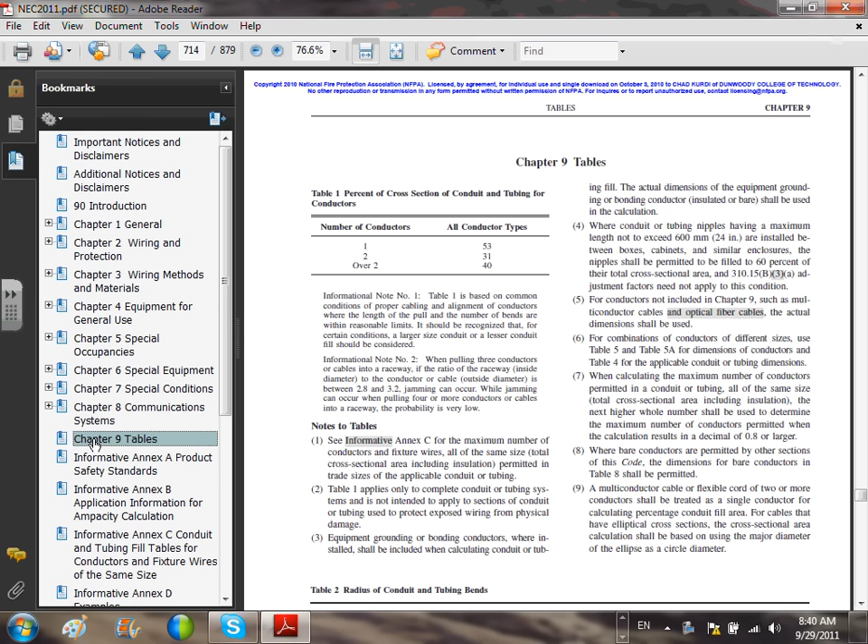Okay, so let's go directly into Chapter 9. Please go with your friend Chad to Chapter 9. When you have a conduit like this, when you fill the conduit, guys, there's a few things that you have to keep in mind. If you have not highlighted this table, Chapter 9, Table 1, please do so. We have a conduit. Either you have one conductor in the conduit, two conductors, or more than two. You can look at the one that I'm holding right here in my hand, it has tons of them. So that's a very important table.

So what you're going to do with your friend Chad, you're going to go here. Okay, where am I here? Mark. Highlight text. Okay, so the first thing I would like you guys to do is to highlight this table if you have not done that. This is a very, very important table to highlight.

So if you have one cable or one conductor, I'm sure some of you are looking at PVC. How would you have one conductor cable? Imagine a 2000 kcmil. Can you put five 2000 kcmil in one conduit? Can you? You can find a conduit that fits this. So if your conductors are huge, you can put them in PVC one conductor at a time. Remember that heat, induction heat, you're going to be very careful when you do that. So bigger conductors in PVC, nonmetallic, no problem. You can put them one conductor at a time.

That's one option. Second, remember if you have a multi-conductor cable. Can we have a multi-conductor cable? Four conductors, one assembled cable. Can I do that? How would you treat a multi-conductor cable? You treat it as one conductor and you fill 53%. 99% of the time, Chris, you will be filling at 40%. Everybody okay with that? If you have not highlighted this, please do so. This is one of the most important things that we have to highlight, and moving forward I want you guys to highlight it.

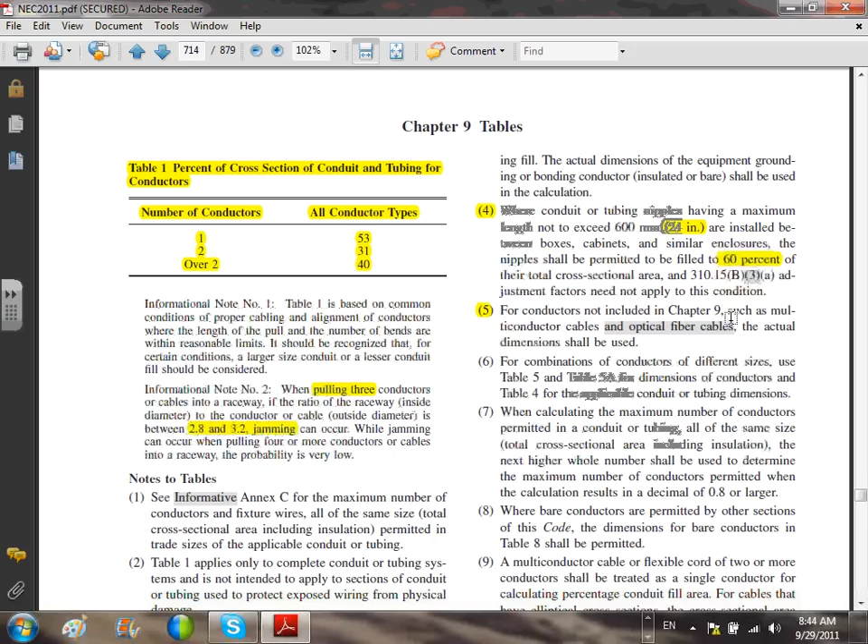Okay, another one, conductors not included, such as multi-conductor. This one is a very interesting note. This will tell you if you're using a multi-conductor cable, or fiber optics, how would you use fiber optics in a PVC configuration? We have it on the journeyman and master exam all the time, guys. If you're sitting for a journeyman exam, here's how they test you.

They'll ask you how many fiber optic cables you can fit in a 2-inch or a 4-inch PVC Schedule 40 if the diameter is 1/4 inch. Then you have to do your calculation from the diameter. What do you do from the diameter? You find the cross-sectional area, right?

Pi r squared, that's the cross-sectional area of a circle, and you continue doing the same calculation. So the only difference between a cable and a conductor is you take the cross-sectional area, pi times the radius squared. And when you get the area, you continue with the same calculation. So this is what it goes to.

If you have a multi-conductor cable, which you will be using, guys, what you're looking at right here is a very clear difference between a multi-conductor cable and a single conductor cable. What you're looking at here is 4 single conductor cables. If I put these 4 in one jacketed assembly and I pull them in a conduit, this becomes one multi-conductor cable. Does that make sense?

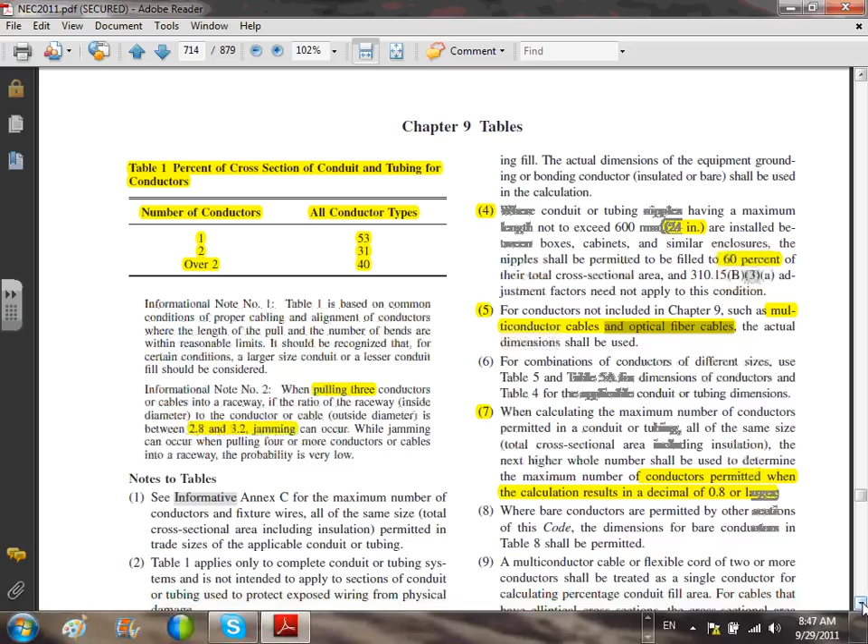And the last one, guys, look at this. If you read this, it will tell you a multi-conductor cable or flexible cord of 2 or more conductors shall be treated as a single conductor for calculating percentage conduit fill area. Once assembled in one cable, you treat them as one single cable when you pull them through, so you can fill it.

If I put one cable, 4 conductors in one cable, my fill will be 53%, right? Because it's one conductor or one cable. Remember that right here? One conductor or one cable. My fill will be 53% if these were assembled in a cable, which they are not. Cool? Very important concept. You can't move forward without knowing these notes. Any question?

Okay. So this is the idea why they drop it so much. Over 2 is 40%, 2 is 31%. What's the rationale? 3 is 40. Why is more than 2 better than 2? When would you use a 2-conductor cable? When would you use 2 conductors only? I guess you can use it for single phase.

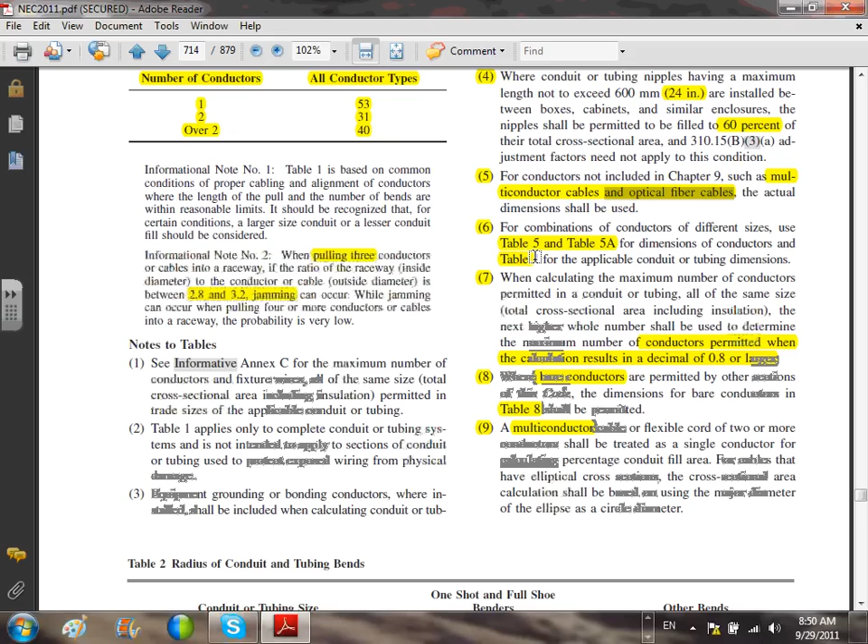And dimensions of conductors is going to be Table number 5. Okay, so we're going to be using these in a second. Really, the most important thing is the stuff that I did a minute ago.

Okay, moving forward. For your conduits, you use Table number 4, guys, to find the fill, the percentage of the cross-section area that you can fill, in all the approved conduits in the US that we use in the code. If the conduit is not here, you have to do a different engineering calculation. All the conduits that we use, guys, are here.

All the conduits are basically here. So let's use EMT. Can you guys see it? So Table number 4 gives you the fill for all the conductors. With an EMT, this is probably where you spend most of your time on this table. Most of your time. Cool? So how does this table work?

Let's go to the largest conduit I can buy as an EMT, which is 4. If I am pulling, which 99% of the time I'm going to be right in here, 40%, then I can fill up to 5.901 square inches of the cross-sectional area of that conduit. Everybody knows how to use that? So I would say 90% of your time you're going to be right in here.

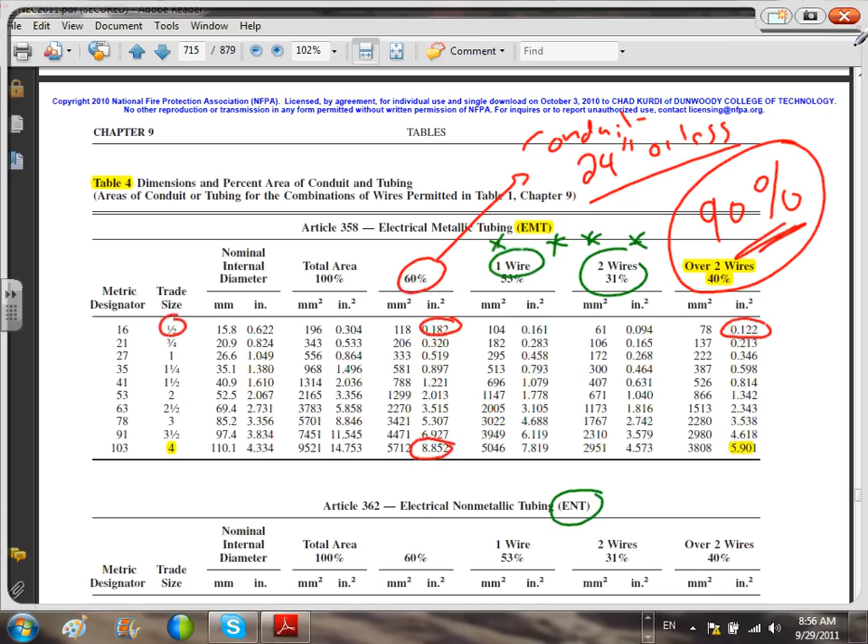Now, Ashley, my friend, if you go down, you will find all the approved conduits and their fill. So your ear, nose, and throat doctor is here, ENT, right? That's like your ENT doctor is here, the conduit, and all the other conduits are directly in that table. I highlighted only number 4 for EMT because it's the most common.

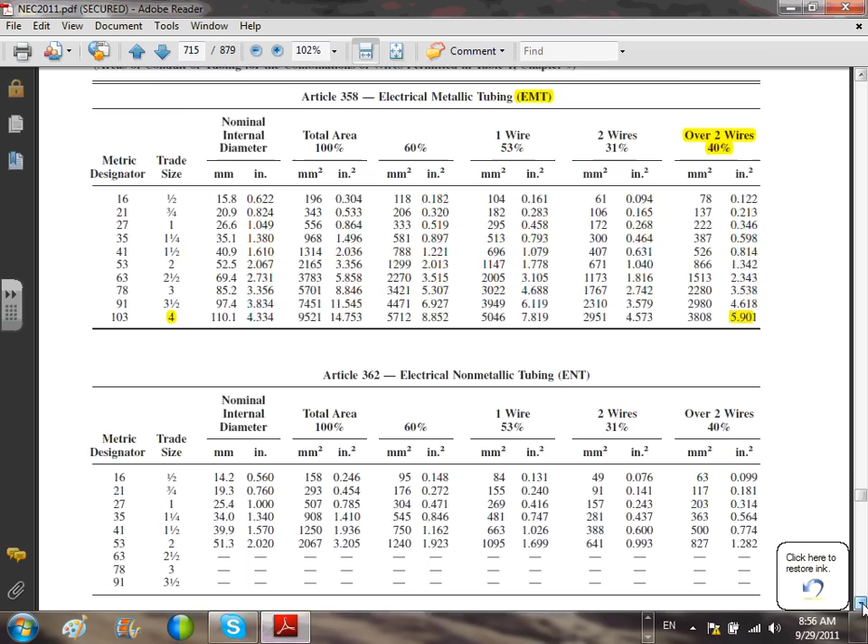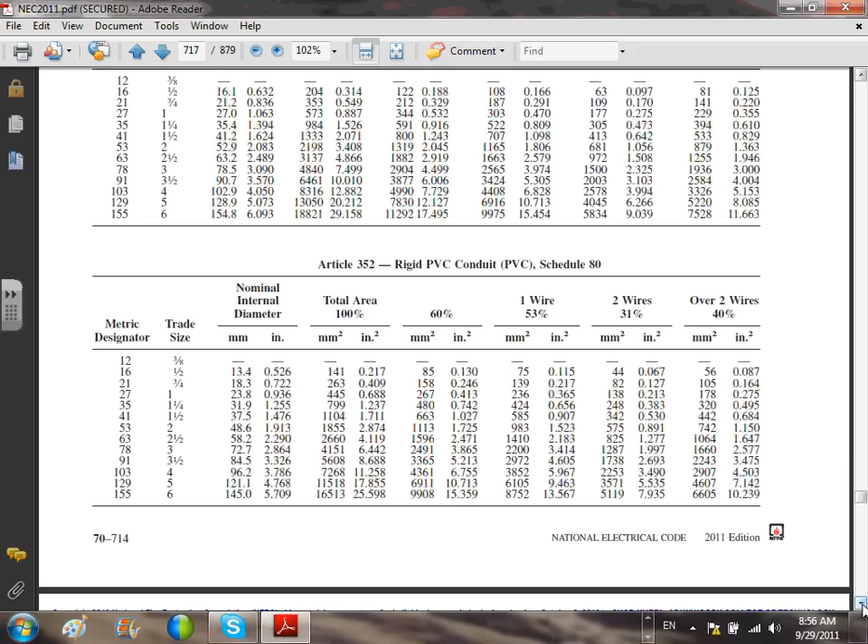Okay, moving on. You guys see the flex? All the way, keep moving. IMC. All the conduits approved are right in here. Now, Chris, all the conduits that you're looking at in these tables are where? In this calculator. All the conduits that you're going to use right here in this table are where? In this electrical calculator. So that's really cool.

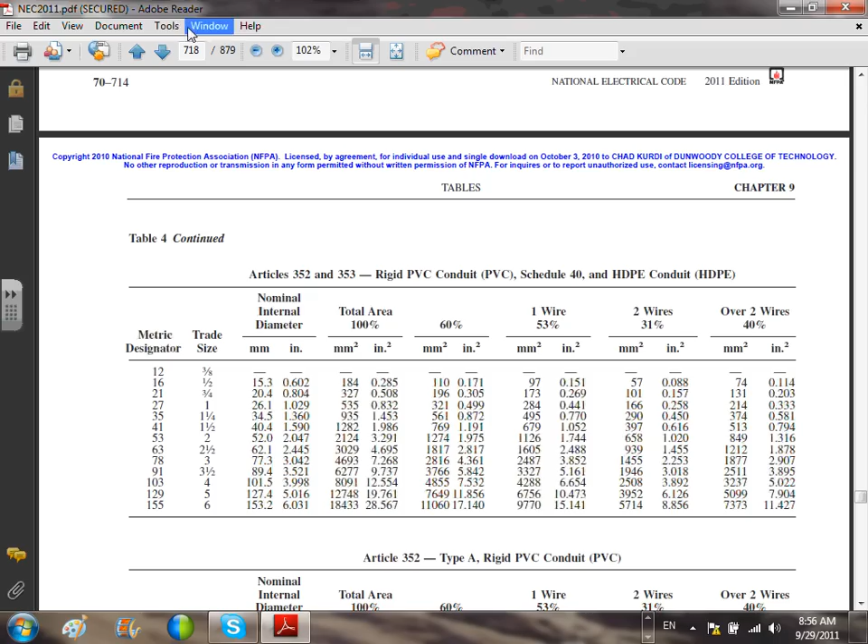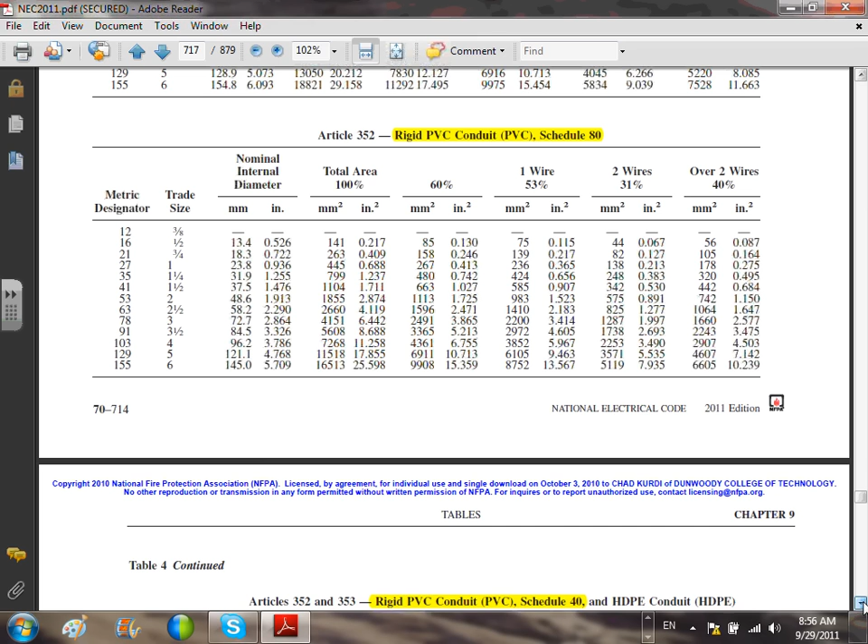Okay, moving on. PVC. As we move through, I want to highlight the most important ones, guys. So PVC, you must know PVC. I mean, this is must know. This is another well-respected conduit. PVC Schedule 40. If you haven't highlighted that one, please do so. You're going to use it. Did we pass rigid? Yeah, rigid. For hazardous locations, please highlight rigid too, because you're going to be using rigid.

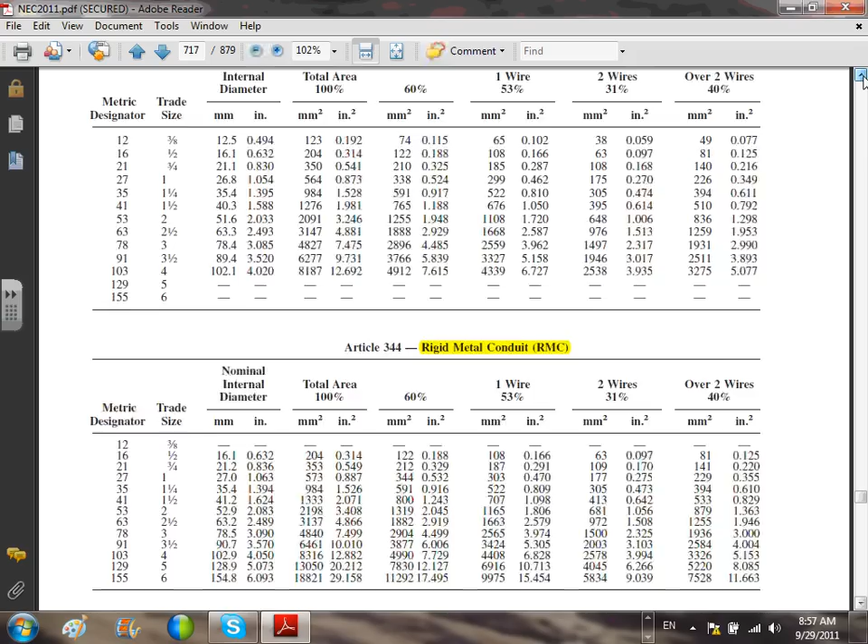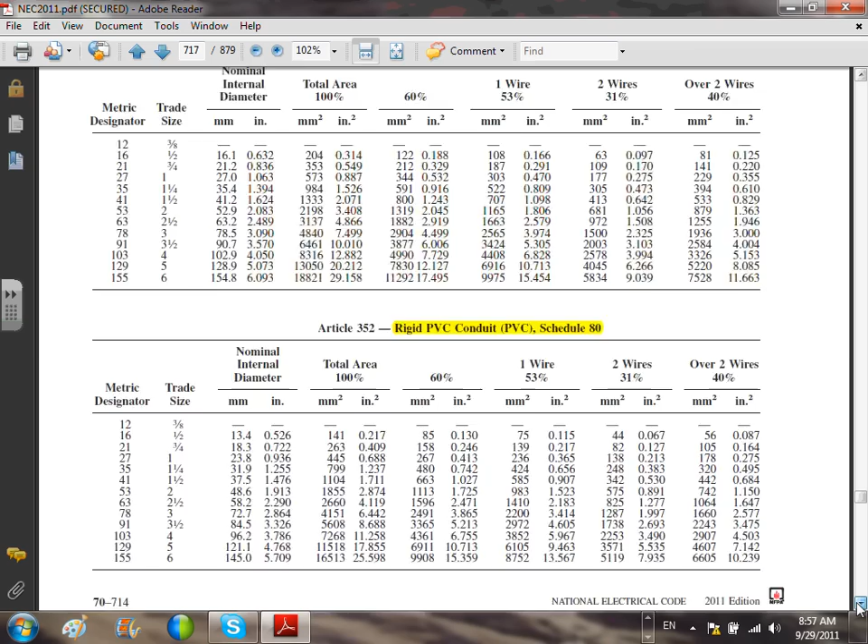Liquid-tight flexible metallic conduit, we only use it to tie to equipment. Okay, moving on, all the way we highlighted rigid type A PVC. I'm just highlighting the most important ones. Okay, that's it. These are the most important. The second table that you need to know and highlight, if you have not done that, is table number 5.

Any question guys about the conduit fill? When we do the conduit fill, define the cross-section area under the right type. Am I going too fast on that one? Okay, so highlight them, make sure you know them. You're not going to hear me saying too much about them in detail over the whole year. Later on, we start saying, I have a feeder, I want you to go size the conduit for me. Second nature to you. You're going to go, which conduit, Chad?

Well, you're the designer. 99% of the time, you're going to be EMT. If you're underground, you're PVC. If you're in a hazardous location, you're going to use rigid. Or for physical protection, you need rigid. That's it, done. If you're tying to equipment that vibrates, or a light, what do you need? Flex. What type of flex, Chad? Flexible metallic conduit, indoor; outdoor, liquid-tight. Done. That's all the conduit that you need. There are a lot of other conduits that have their own deal, but these are the most important ones. Okay, moving on.

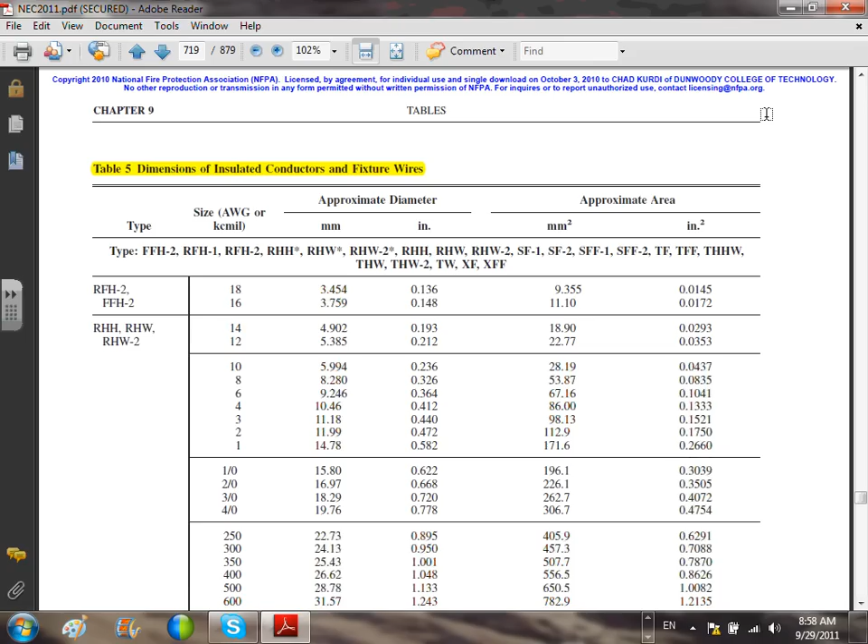To use this table, guys, it's interesting. Let me just tell you what's interesting about this table. There are a few things. Number one, the type. You need to understand the type of the insulation here. You need to understand the size. You also need the square inches, unless you're working in Europe and you use square millimeters. The diameter is not a big deal, but these are the three most important things in this table.

Okay, let's take this. Suppose I have an RHW insulation, and suppose my conductor was 600. Are you guys okay with that? 600. What's the cross-sectional area of this conductor that I can use for conduit fill? Right here. If you don't know this table, please get used to it. Another example. Suppose my conductor is RHW-2 insulation, and the size that I'm using is 4/0. So the cross-sectional area for my calculation is 0.4754. Everybody knows how to use this table? We're cool? It's as easy as that.

Now it gets easier, Phil. You don't even have to worry about that. Look at your friend, the calculator. All this information has been input in the calculator, and you can pull it directly for every size. Isn't that cool or what? So it takes the time out of going to the tables.

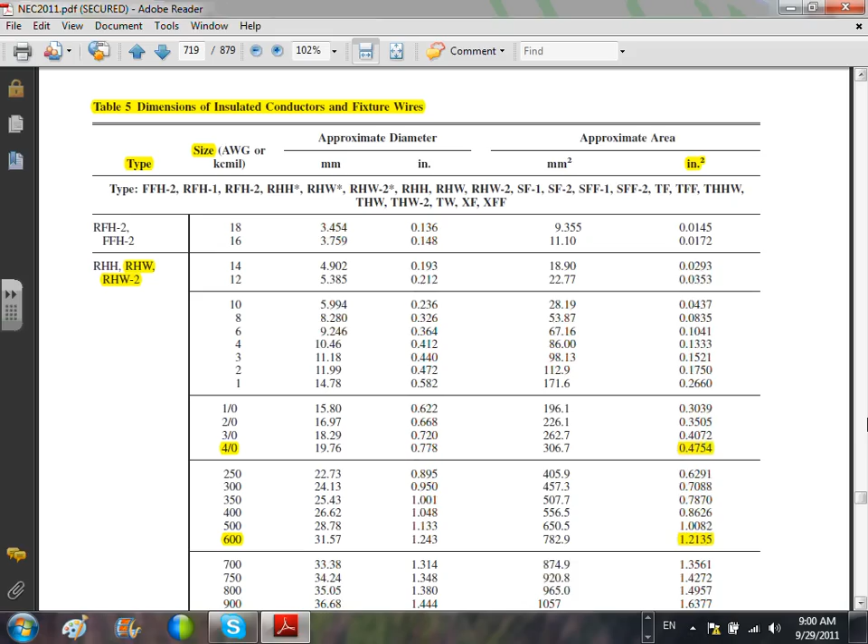The rest of the time you go golf or you go deer hunting or bear hunting, like Ashley would do other things.

Okay, let's keep going with table number 5. I'm going to highlight this calculator, guys. Very important when we use it: it doesn't take all the insulation. It only takes the most common insulations: THHN, THW, XHHW and XHH. These are the most common insulation.

Between these insulations, THHN, XHH, XHHW, THW and THHW, guys, you probably covered 90% of what you need in a building. Only 90%. The other 10%, you have to refer to the table. For example, if you're looking at RHH here, please don't look at it. It's not there. Special type of insulation. 99% of the time, guys, you're going to be using THHN, THHW, XHHW or XHH. So these are the most common insulation. Okay?

I think that when they put the X, they're all rated for 90 degrees from a derating purpose. To find the definition of all these, remember table 310.104. I don't know where I am on my computer now. Okay. They're all the same, but it's rated for 90 degrees. That's the difference, for example, with THHW. So X, where's the X? You got THHW, where's my X here? On page 119. Yours is going to be slightly different than mine.

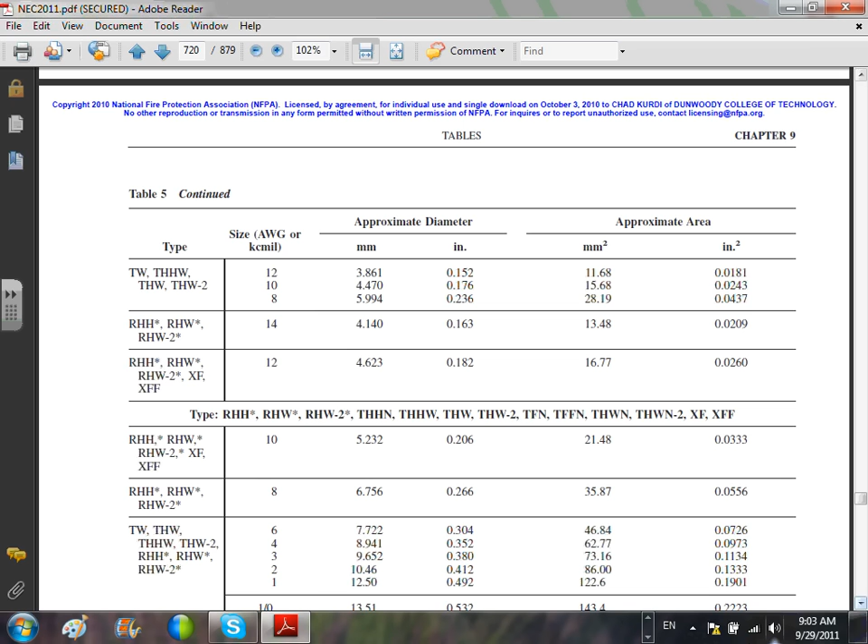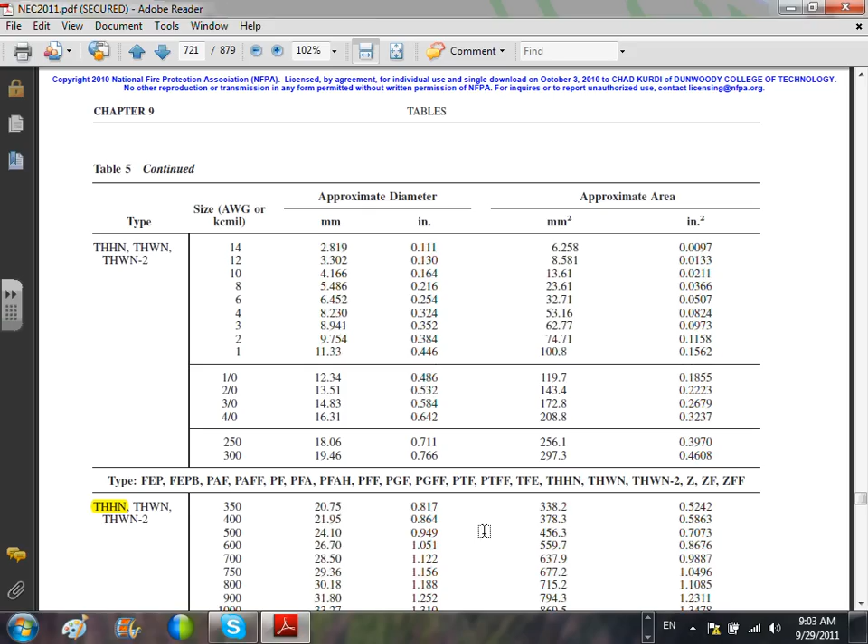So let's go highlight a few things here, the most common ones. Here you go, THHN. Let's go bigger. Here's my THHN, guys. I have a 400 amp panel, and I'm going to feed it from a THHN conductor to a location. I'm going to use a 500 kcmil. 500 kcmil gives me 380. 380, you can tie it easily on a 400 amp.

So the 400 amp panel is fed from 4 conductors, 500 kcmil each, and I'm going to size the conduit for it. So here's my 500 kcmil. Here's my THHN. Can you guys see it? There you go. So I have 0.7073. So what do you do? You multiply by 4 and go find yourself what type of conduit you have. EMT, and under which column? 40% column, and find yourself a conduit.

Okay, let's do that example quick here, guys. Here's my 400 amp panel. The feeder that feeds my 400 amp panel is THHN. I have 4 conductors, I'm not derating, 500 kcmil, and I need to size the conduit. EMT. You guys have any issue with that? 4 conductors. Let's do it. Here's the number that you need. I need somebody with a calculator, please.

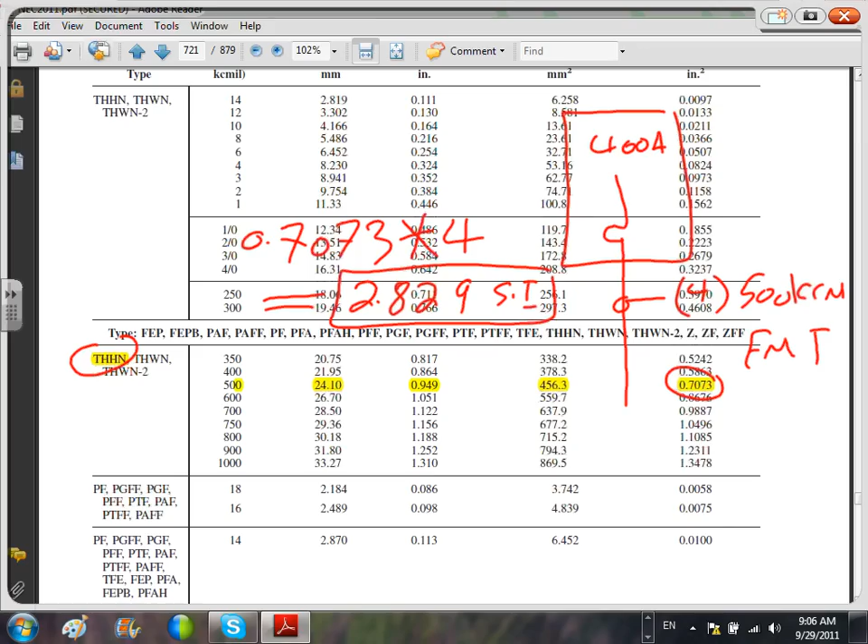We got square inches. Then what do you do next? I want you guys to remember the number. Everybody knows how to take this number and multiply it by 4. Later on, we'll be doing it through a calculator right on the spot, and I will do it in a second here. Let me take a snapshot of it. So let's go find a conduit right on the spot.

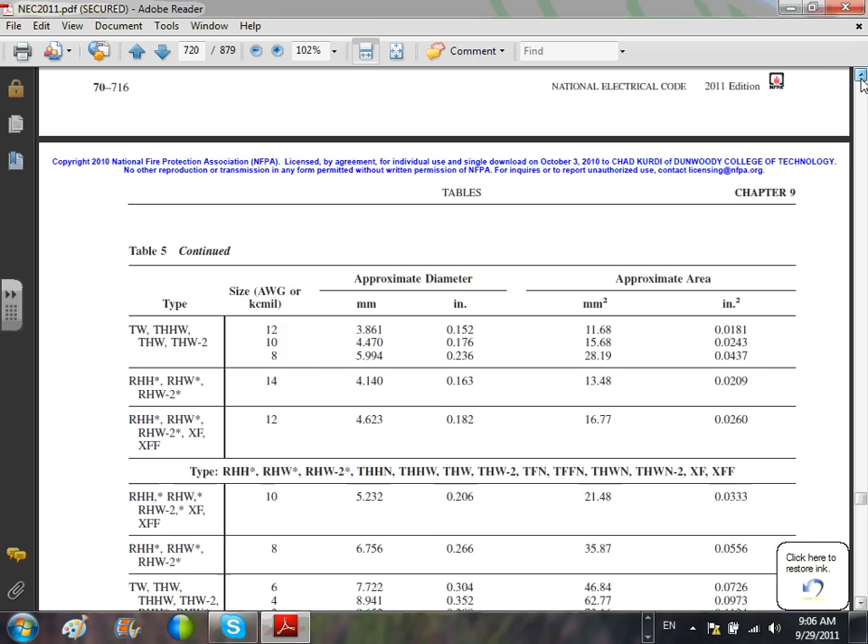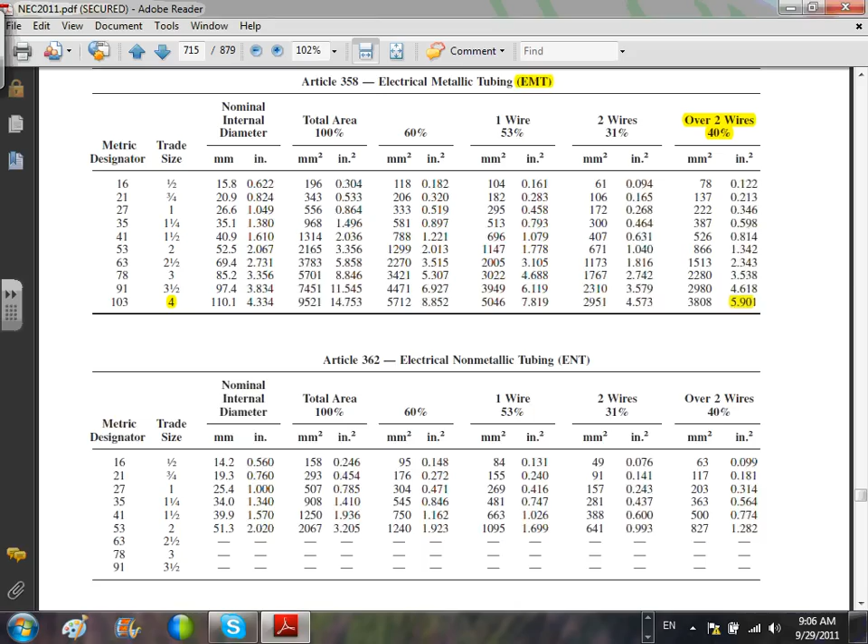We're going to go back to EMT conduit. You guys remember my beautiful EMT conduit? Back to EMT conduit. There you go. Went too far. Back to EMT conduit. Okay, so remember what was the number that we're looking for? Here's my EMT conduit. 2.829. My EMT conduit is here. It's all the conductors.

2.829. So how many of them are there? I have 4, so I have to go right here under the cross-section area, and I need to find a number that's equal or higher than that one. So I have 2.8, 3.5, 2.3. I need this number, right? I can't use 2.3 because it's low. If you cross-reference this number, that will get you to conduit number 3.

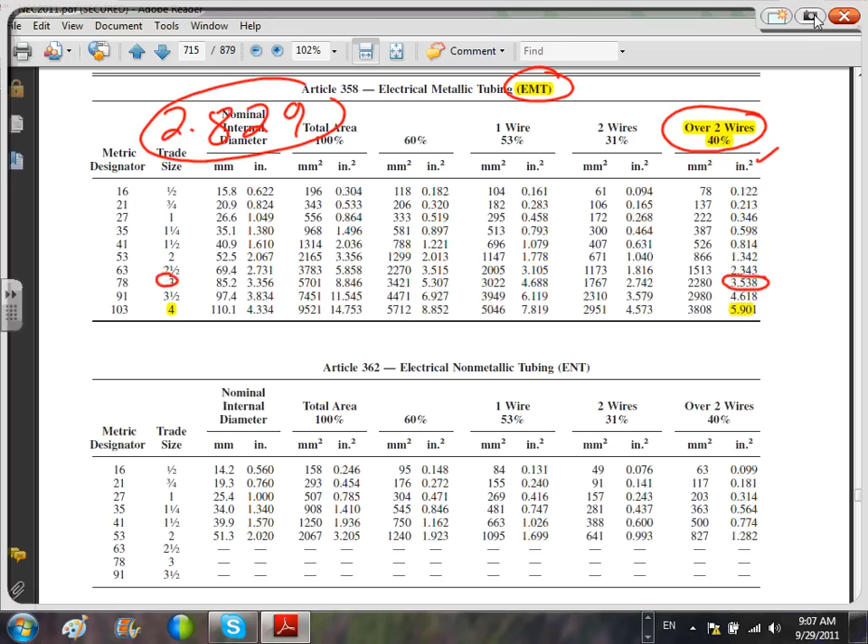Let's use the calculator. How about that? Let's use the calculator for that one. So number 3. Okay, get your calculator handy. So we did that one. Get your calculator handy, and let's go do it with our calculator. And hold your horses for a second with your friend Chad. Remember what we said?

Okay. The first thing I will do: since it's 3-phase, I always like to default to 75. So make sure calculator 2011, 3-phase, 75 copper. Everybody set at that by doing set 7 and set your calculator. How many conductors? Just a quick reminder, guys, we were 4 conductors and 500 kcmil, and the conduit is EMT, and we came up with 3 inch. Let's see if we come up with the same 3 inch here. Let's start here.

First, the conductor size. You're going to go 500, right? For the kilo, hit the word kilo. So I have 500 kilo. Kilo what? Kilo Chad or kilo dollar? Up to this point, it doesn't really know kilo what. So we're going to go from the kilo to wire size. See where it says wire size? Now I have just assigned a 500 kcmil copper to the calculator. 500 K wire size. Wire size right here. Everybody got that one?

Now, how many of them, Phil, do I have? 4. What insulation? THHN. Do you guys see the insulation at the top here? So I have assigned 4 conductors THHN, 500 kcmil each. That's what I told the calculator. Now what do I need next? Conduit. Everybody knows how to assign the number of the conductors: you type the number and then the type of the insulation.

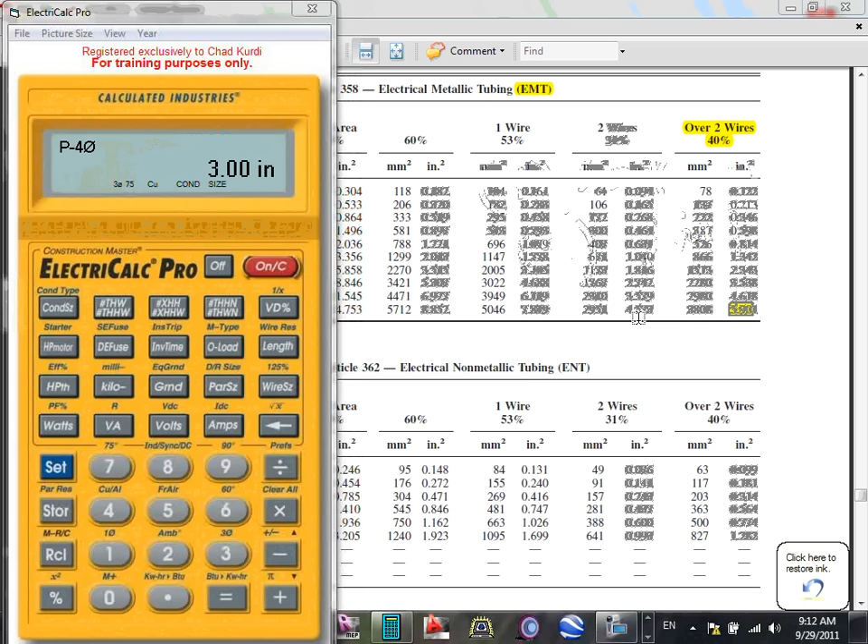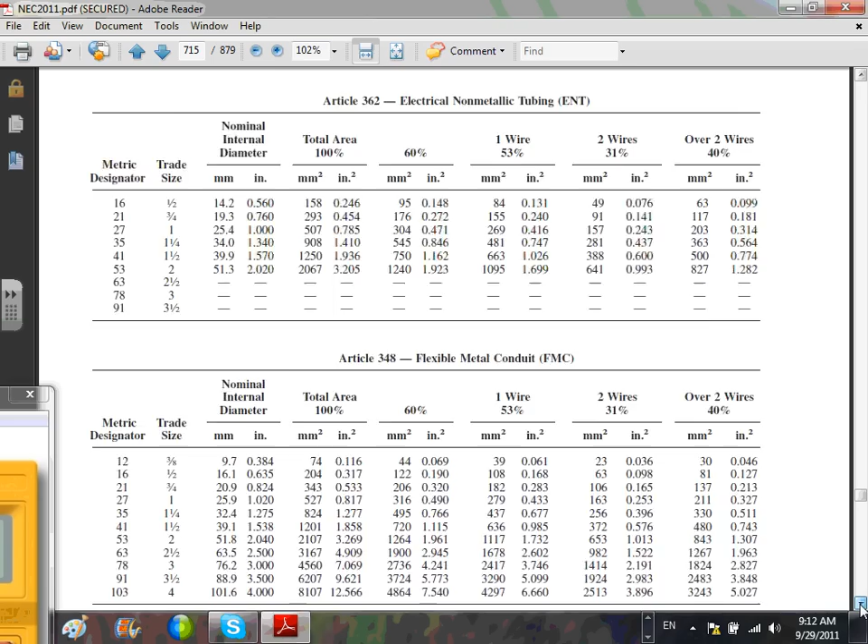Okay. Let's take a snapshot here and exit this so I can keep moving. I'm going to move my calculator to the side so it doesn't interfere with my business. Okay, so any question, guys? Here's my EMT all the way. So let's do another example. And Chris, I need your help with this example. Let's go back to, there you go, back to a real installation.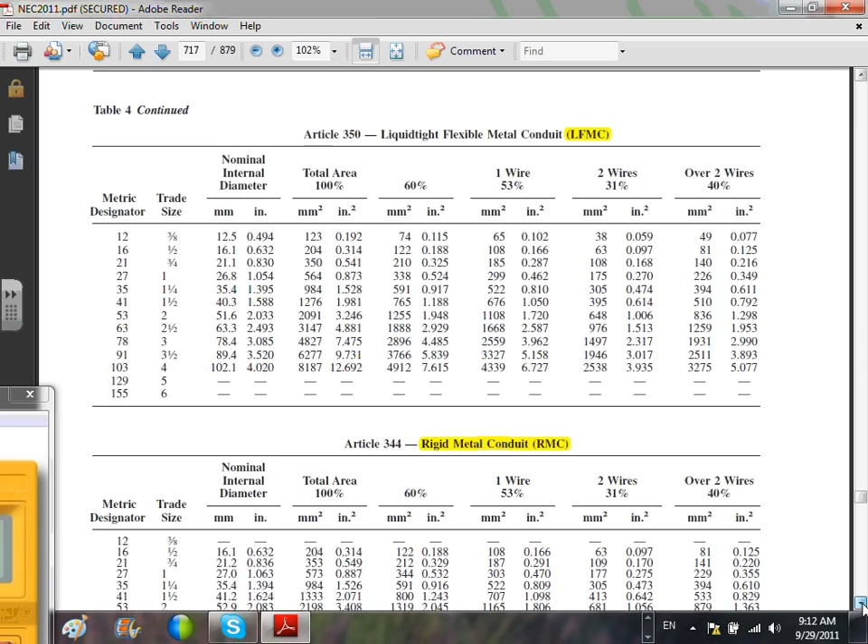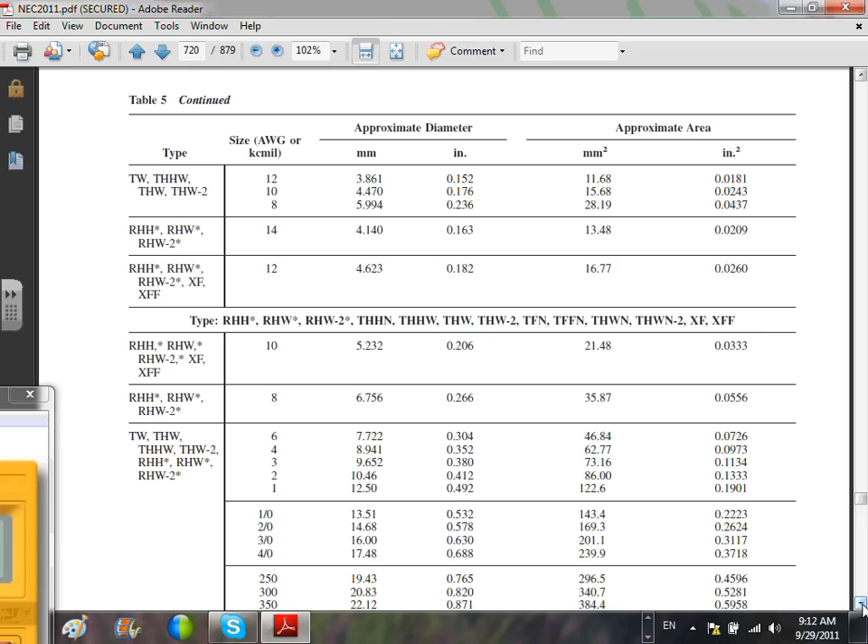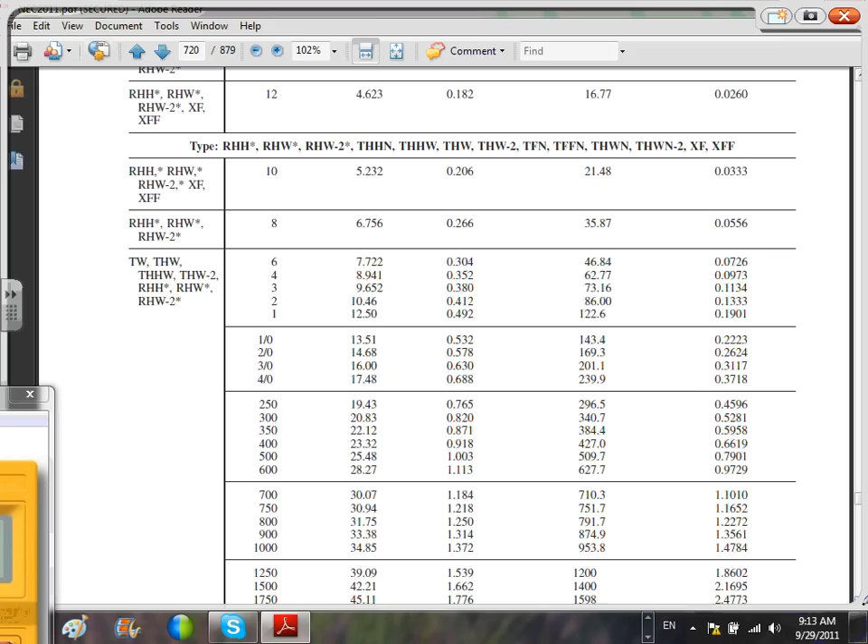PVC Schedule 80. We'll take a real example, guys, with THHW. Okay, do I have THHW? Yup, we have THHW. All right, here we go. This is a real example. We're going to encounter it all the time. I have a panel. My panel is, let's say, 400 amp, and you are sizing the conductor for this 400 amp panel. I derated the neutral this time. So here's what I got.

I got my 500 kcmil, 3 conductors, 500 kcmil, THHW, because we're going underground. Typical. You're going underground in W, right? We have 1 neutral, derated neutral. You can derate your neutral, no problem. Usually, when we do the calculation, we end up with 1 or 2 steps below the phase. So I have 500. I can probably go all the way to 400 with my calculation. I have a 400 kcmil neutral, the same thing, THHW.

The conduit that I want, Ashley, my friend, is a PVC conduit, because I'm coming underground. Conduit of choice is PVC Schedule 40. Can I use EMT underground? Yeah, but you will not be smart. You can, but it's not a good idea. It's going to rust. Can I use rigid? Yes, you can, but it will rust over time. The best conduit for the application underground is PVC. If it's buried, what's the likelihood that Chad is going to hit that conduit with his hammer? No. Okay, and I need one conductor, ground.

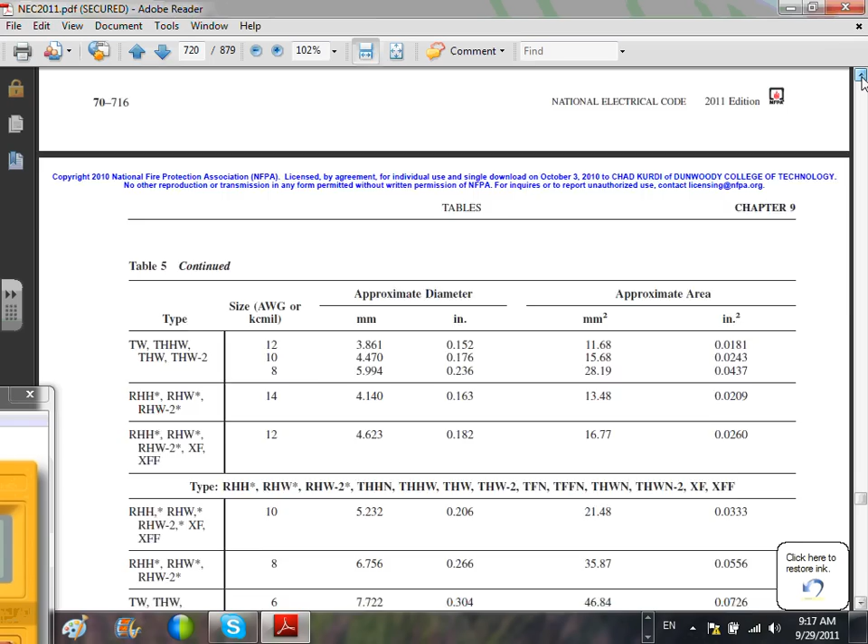So Chris reminded me of 3.146, and we're looking at what type of conduit. We're looking at a conduit PVC Schedule 40. And the question is, what size do I need in PVC Schedule 40? Everybody got that one? Straightforward. Do your math. So let's go X here, so I can go all the way up. You guys are going with me, right? What did they say? PVC Schedule 40. Chris, remind me again. What was that?

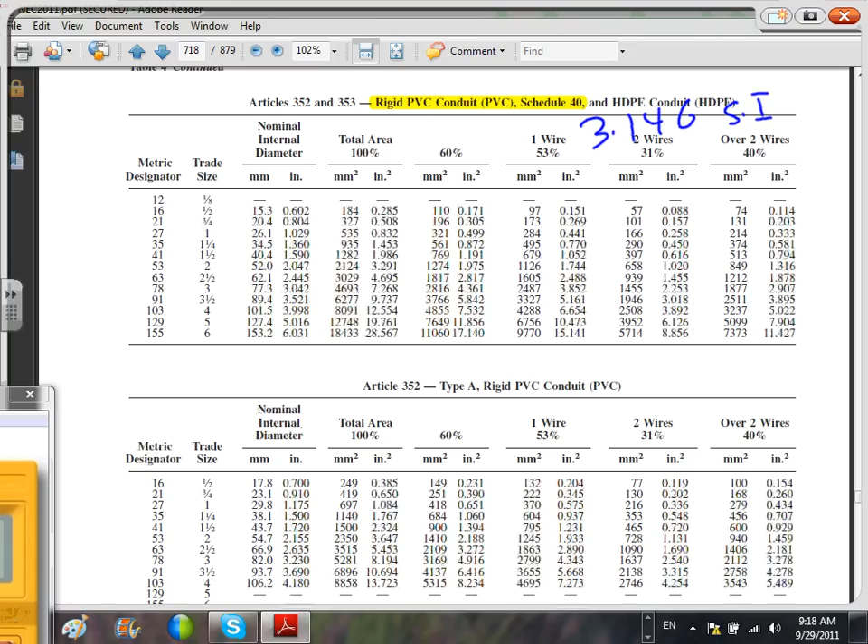3.146 square inch, right? Okay, so here's my number. Under which column? This column. And I'm going to go look at 3.895. So this is my baby. 1, 2, 3, 4. And I have 3.5. Is it 3.5? Yeah. Right? Did I do it right? 3.5. I need 3.5. Let's go do it with a calculator now. So we came up with a size of 3.5.

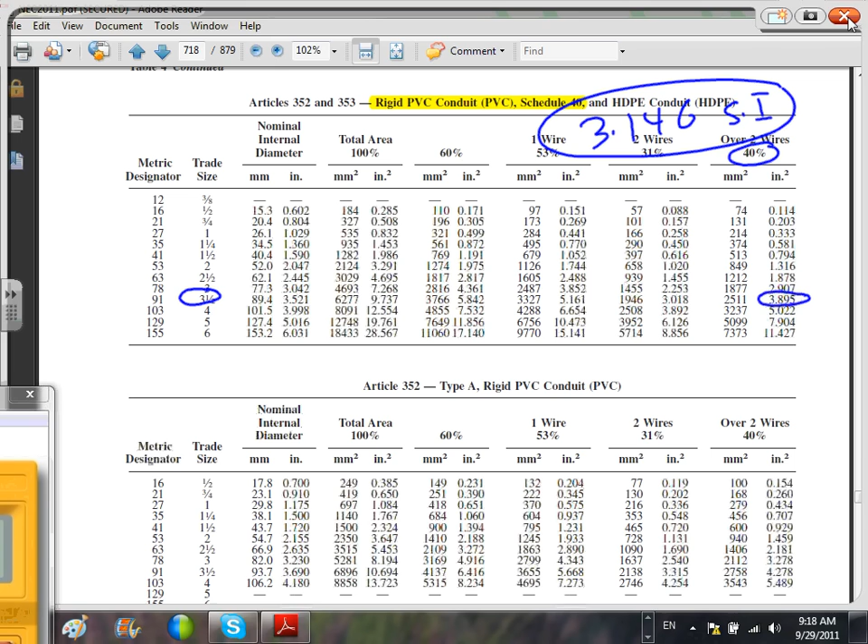Let us minimize this and open my technology. Okay, where are we here? Right here. And grab the calculator, which is sitting to the side. This is the example that we did, right? I want to put it in a place where I can see the example. All right, so here's my example. I have three 500 kcmil, one 400, and one number 3. Let's do it. Go clear your calculator. Double click on the clear. Your calculator is clean, right?

We're going to start with the 500. You're going to type 500, and it's not KCHN, it's KCM, so K wire. So I have 500 copper. You can change to aluminum, it doesn't make a whole lot of difference in this application. Now how many of them do I have? I have 3 of them. So you type 3 and hit what type of insulation? THHW. It takes THHW and shows it as THW, but don't worry about it. The calculator takes THW and THHW together.

Now there's an example about a nipple, which is 24 inches. I want to remind you, you can't do this one on the calculator, but you know how to do the math. All you have to do is the same calculation. The only difference is you go under the 60 percent column. That's all. So I'm not going to do an example like this, but here's what I want to highlight, guys, before I leave this, and I assume you're going to carry it with you as we go through. So all the way, we got all the conduits. Moving on, we highlighted my conduits.

Okay, the second thing, so chapter 9, table 5, the other one I want you guys to know is, so we know how to use the cross-section area from table number 5. Now, what is 5A? Have you guys used 5A? Anybody ever used 5A? Compact conductors. What the heck is it? Anybody know what a compact conductor is?

Compact conductors, they make them so the strands are so close to each other, almost tight together, so tight that for the same 4/0, it's a smaller diameter. If you take 4/0 compact versus 4/0 non-compact, the 4/0 compact would be a smaller diameter, smaller cross-section area than the non-compact. Who cares? Where would you use them? They're expensive, you're not going to use them except for retrofit.

So take this, Zach, you have a 4-inch conduit here, and you outgrow your 4/0 conductor, and you need to go now to 300 kcmil. And you can't fit the 300 kcmil in the 4-inch conduit or whatever. So what do you need to do? You go and buy special conductors, called compact conductors. And that's where they use these.

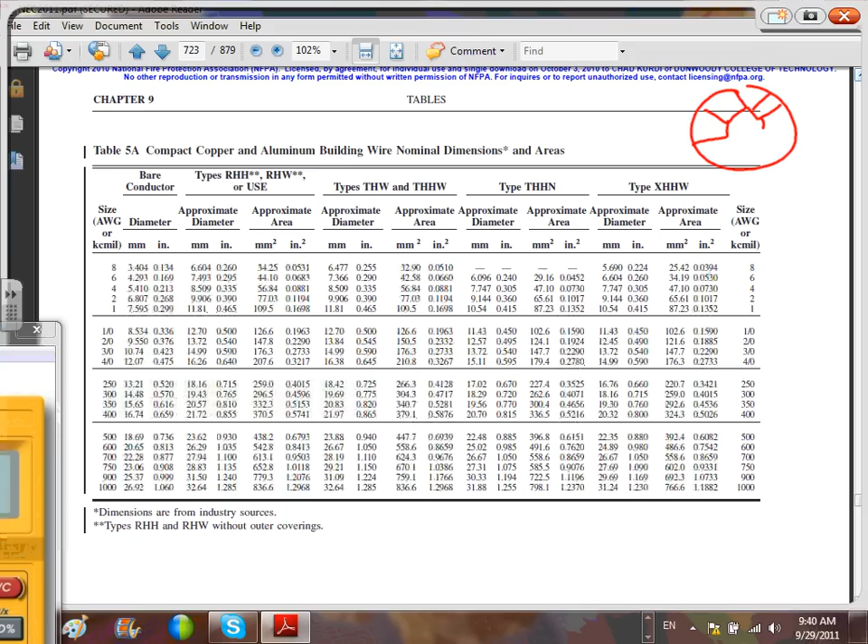They're going to look something like this, aluminum uncovered, guys. If this is the strands, they look something similar to this. That's how they make the strands, so they can fit. Can you see that? This is compact versus non-compact. Non-compact will look something like this. See how the non-compact conductors are round. These are stranded. Of course, we're talking about stranded conductors here. I hope you understand. Okay?

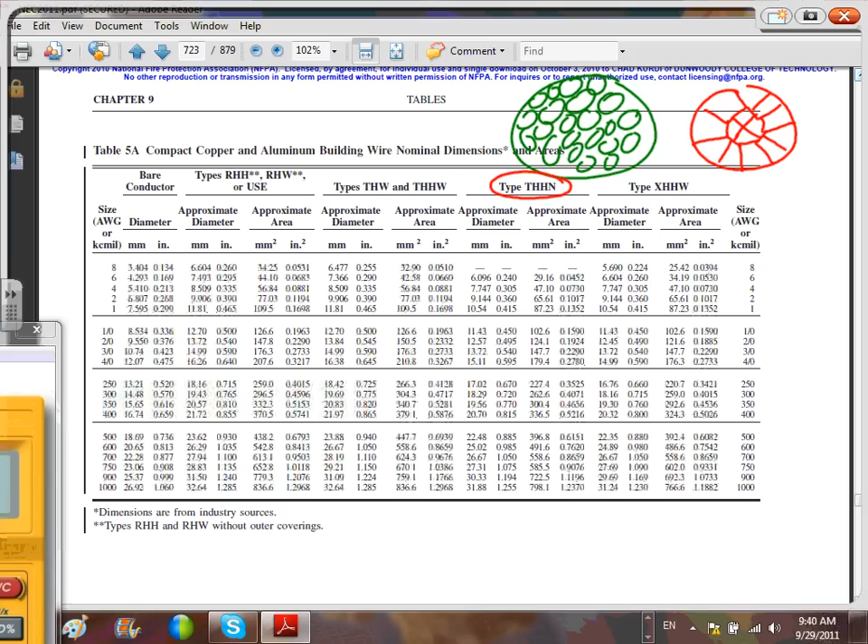Compacted, non-compacted. Who cares? You don't have space between the strands, and you have a smaller diameter for the same size, which means you can fit more conductors in the conduit than normal conductors. So take this. Let's do this. Suppose I have THHN, the single most important insulation that I'm going to be encountering, and I want to remind you guys it's for copper as well as for aluminum, right?

For copper as well as aluminum. So let's take, I like 500, so let's take a 500 here. Here's my 500. For THHN conductor, 500, the approximate cross-sectional area is going to be, what is that? The first right in here. And if it's XHHW, it's going to be this. And if it's THW or THHW, any one of these, it's going to be right in here.

And you guys can see them in your machine. 0.6939, 0.6151, 0.6082. Now, can I do compact on this calculator? No. So put the calculator out if it's special. When would you use a compact? You will probably encounter this compact, I'm going to say, 5% of the time in your career. Just be aware that there are conductors that can fit in a conduit.

Only retrofit, it's expensive to make the whole thing. Can I make it all rewired with compact? It will be expensive. Okay, cool. But I want you to be aware. How do you do the calculation? The same way, guys. So suppose I have 4 conductors and the insulation is THHN. What do you do with this? You multiply this by 4. Right? And you do the same calculation.

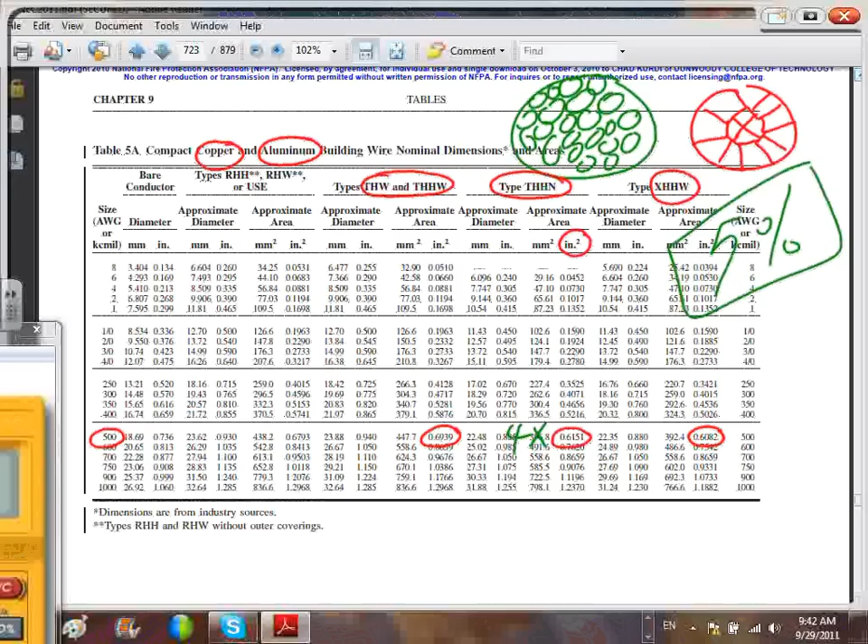Do you have the key for the big closet? I need to get food out there. Yeah. Give me a second here.

Okay. Any question about using the compact? Straightforward, exactly like 5. So please don't use compact conductor unless it tells you, unless you know that you're using compact conductors. Copper or aluminum? Any question? Okay, so that's easy to make a calculation for that one. Just for the heck of it, I would like you to do this one for me.

4 conductors. Can you guys do the math for me here, please? 4 conductors, THHN, times 0.6151. Can you give me the answer? Let's go find an EMT conduit to fit it. See how big of an EMT conduit. So can you take 0.6151 times 4 and give me the answer? No, it's different now. This is compact. Yeah, I guess you can put the cross-section area, 0.6151. Anybody?

So 4 times 0.6151. 2.4? 2.4 square inch. No, I'm sorry, Ed. It's all right. Any other? Close. What is that? I need 2 people to agree on that one. You guys want 10 out of 10 in participation? Oh, it's 2.46. Okay, 2.46 square inch, 4 conductors, 500 kcmil, THHN. Let's go, guys, find a conduit for it and see how big of a conduit we can get. Remember, it's compact.

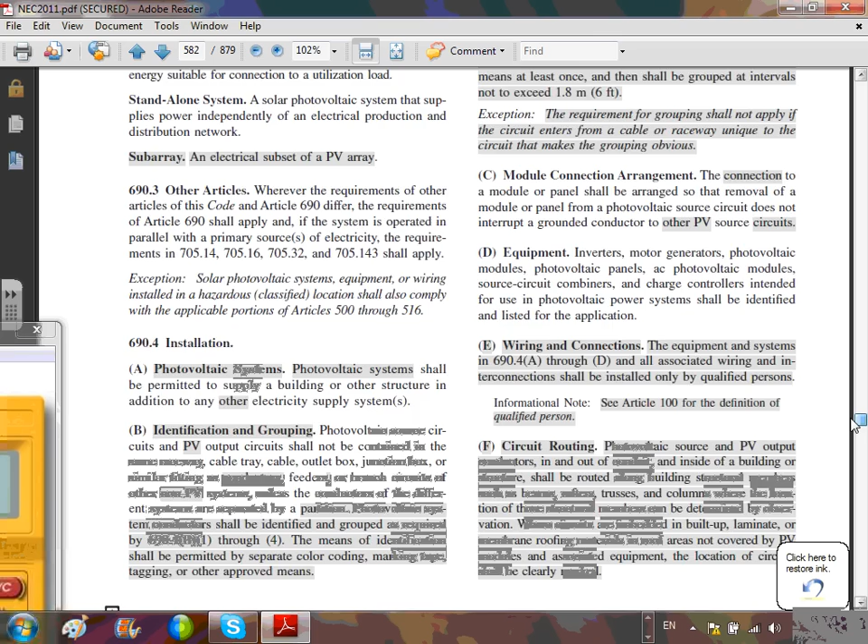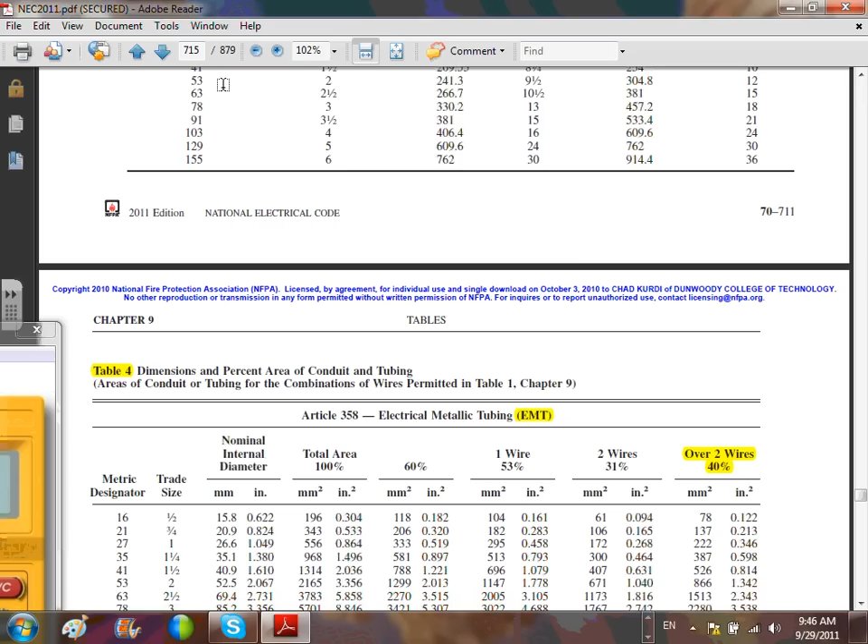Let's go EMT. Oops, don't want to do that, Chad. That will get me way out of my comfort zone here. Okay, let's go to EMT. Here's my EMT. All right, so what did we say? Do you remember it? 2.46. 2.3 here, 2.46, 2.4, so I have to use this. I'm doing EMT, so I have to use, right, 2.3, 2.4, so that will give me number 3.

Number 3. You guys remember how much we got when we had 4 conductors, 500 kcmil THHN? Remember what we got, 3.5? Was it 3? Yes. Okay. So we didn't gain a whole lot in this because of the number of conductors. Would this be considered one wire though? No, there are 4 conductors, compact. They are 4 single conductor cables. Any question, guys? So we have 3. And we had our example before.

Okay. All right. Any question, my friends? Any question about that before I go to a different part? So we did compact. Let's keep going. I want to highlight two more tables, and then we'll be done with this. Make sure that everybody knows it well and knows how to use it. We did the compact here.

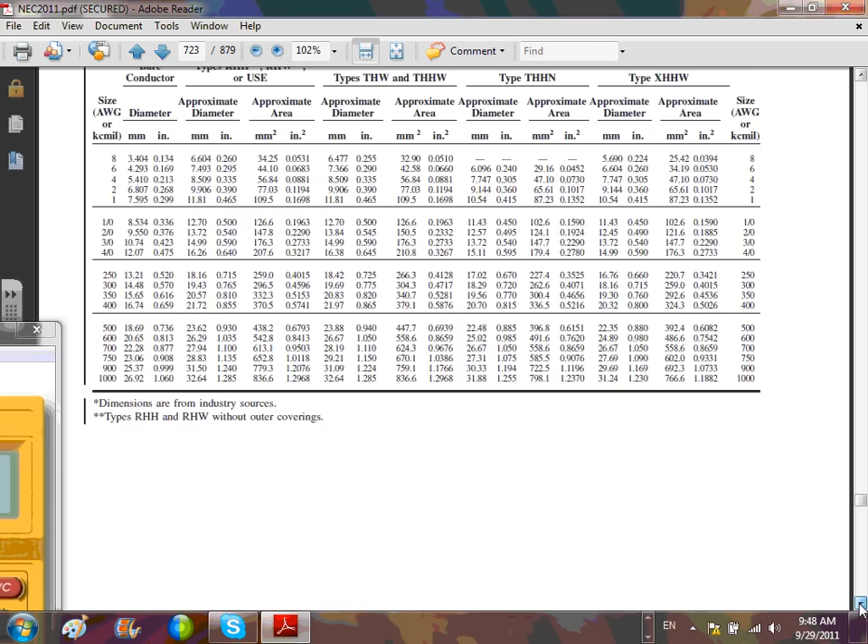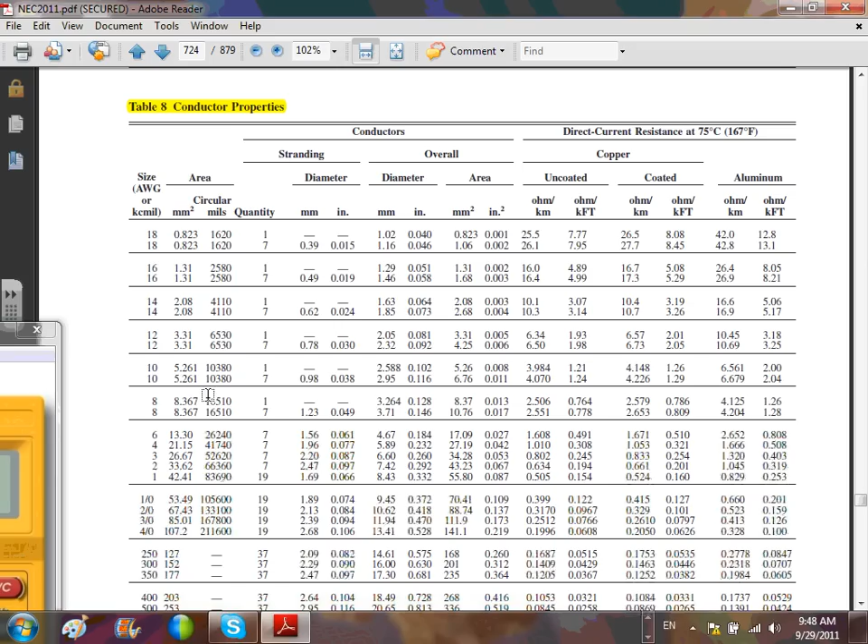Okay, Table 8. If you have not highlighted this, please do so. Table 8, guys, we're going to use it for two factors: when we size voltage drop, and also if your conductor is bare. Let's suppose I like the 500, so I'm going to go to the 500 kcmil.

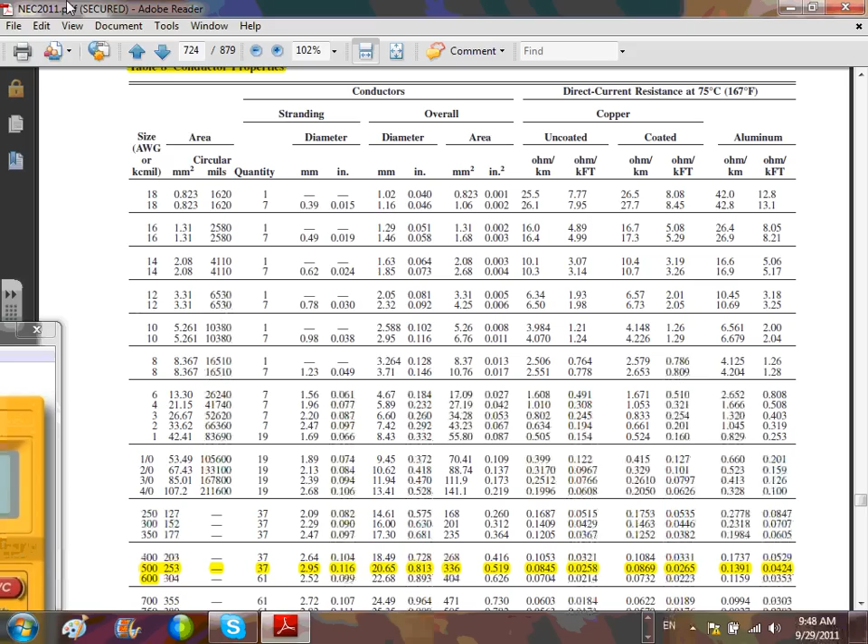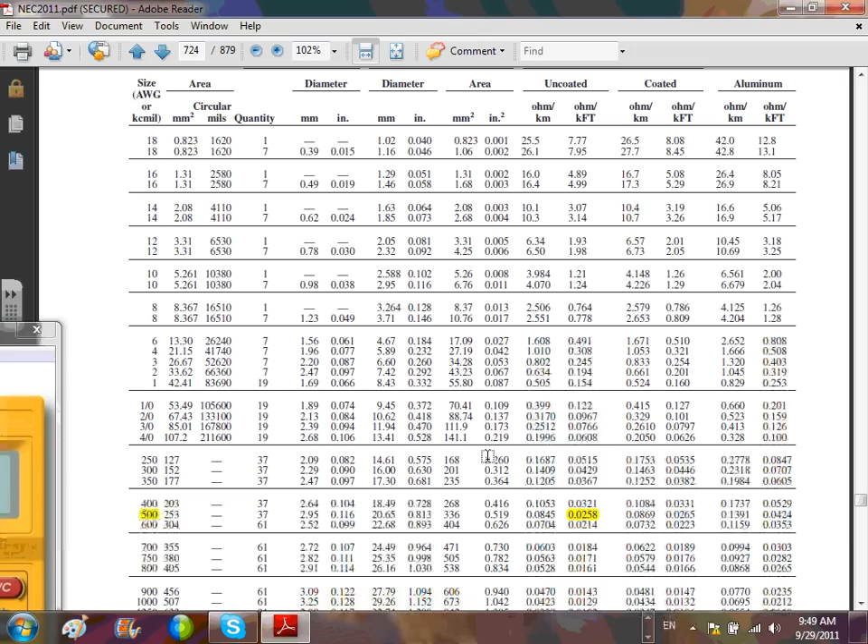So I have 500, and what I want you guys to highlight here is the cross-sectional area uncoated, the cross-section area if that was a bare conductor. This is Table 8. So that's the first one, uncoated ohm, and the cross-section area that you need to highlight here.

If you're pulling a 500 kcmil bare conductor or covered, no insulation, that's the cross-section area that you're going to be using, guys. So very, very important. My cross-section area for 500. Only if it's bare or covered, you use this table.

Cool? Number 2, if we're doing a voltage drop calculation for copper, here's my kilofoot, and we'll talk about this one later when we do voltage drop. That's my DC resistance for the voltage drop calculation for copper. If we're doing aluminum, this will give me the aluminum conductor resistance. This is how we use this table. From a conduit fill point of view, guys, that's the only important number right now, right in here. Any question?

Now the question would be for my friend Phil: can I use a calculator for this one? No. How often do you pull a conductor bare or uninsulated in a conduit? The only time you can pull a bare or uninsulated conductor in a conduit is if it's an equipment grounding conductor or bonding conductor. So if you have PVC, for example, yeah, you can. Usually you pull an insulated conductor most of the time. But that's the only way: PVC, bare conductor for equipment grounding conductor or bonding. Okay, got that one?

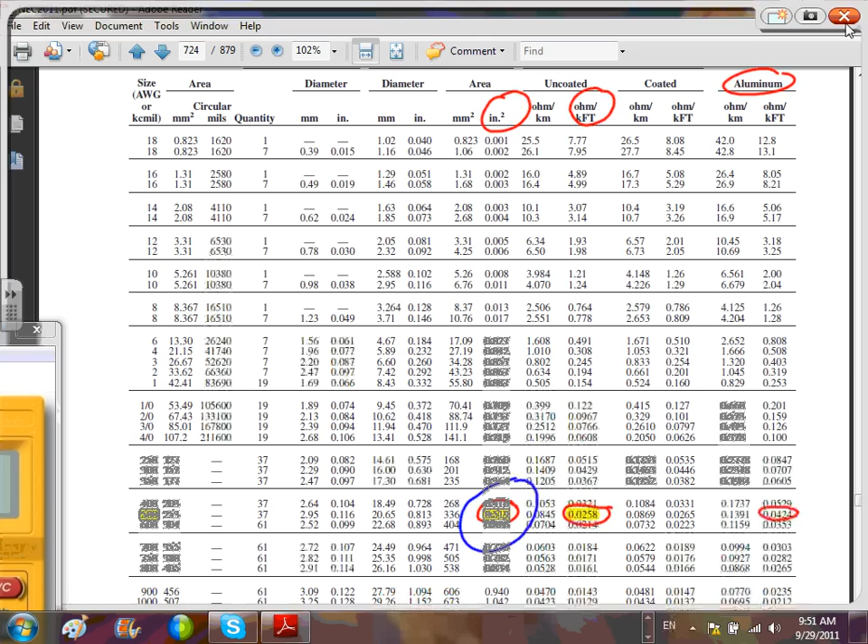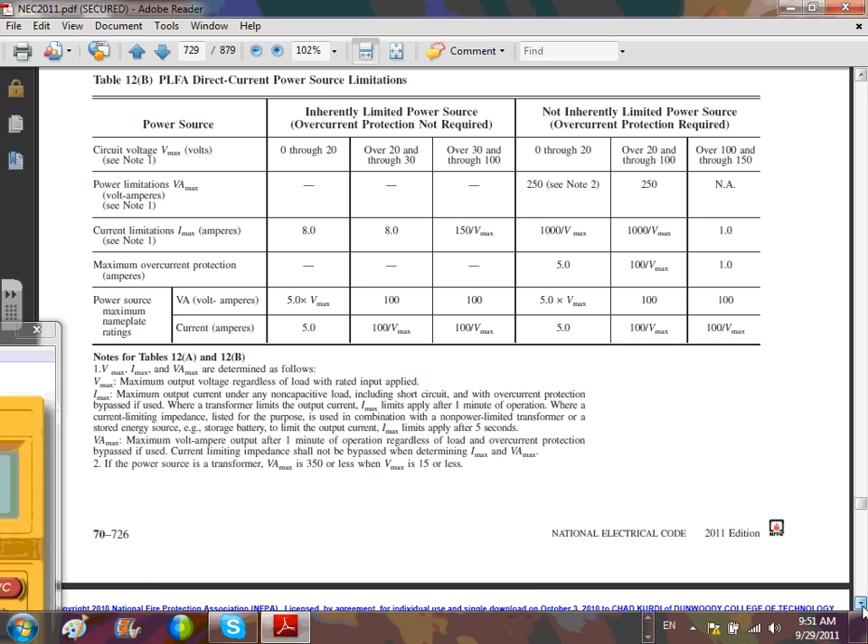The last thing, my friend, and we will get into the AC resistance as we go through. There's a table, Table 9. We'll get to it later on. But I'm going to go all the way to Annex C, guys. And that will be it in terms of conduit fill, voltage drop, all this good stuff. Can you guys go to Annex C? If all your conduits are the same, you don't have to mess with everything Chad has just said. You're going to go to Annex C right on the spot. If you haven't highlighted Annex C, please do so.

I want to remind you of two tables. This one here is EMT. What's the difference between the EMT here and the EMT right underneath it, with the little star next to it? The one underneath is for compact conductor. Remember the compact conductor we just talked about? If you have 500 kcmil compact conductors, 4 of them, and want to know what EMT conduit you need to fit them in, you're going to go to the lower one, right here. Any question, guys, about that?

So if I were you, I would highlight all these, my friends. Especially EMT, because you're going to be in it a lot. You need to highlight PVC. I always highlight PVC Schedule 80 and PVC Schedule 40. These are rigid or intermediate. These are the most common ones; if I were you, I'd highlight them in my text, and rigid here because they use rigid. You probably have to highlight them, and it tells you where they are located in the code.

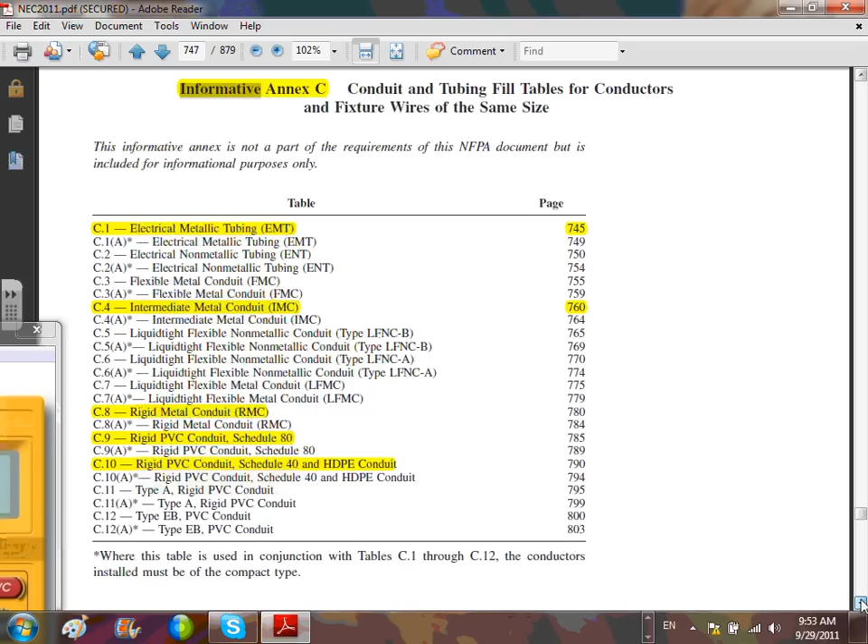EMT, since 90% of the time probably guys are going to be in EMT, let's go directly to EMT. Here's my EMT, right? Everybody knows where we are. C.1 is EMT right here. Highlight my EMT. Let's go to the insulation dear to my heart and dear to yours probably. Let's go to THHN. Here's my THHN. Let's go down here so we can see the conduit size. Okay, so here's my THHN. Can you guys see the THHN?

And in an EMT conduit, suppose I have a 4-aught, how many conductors can I fit in a 4-inch EMT if all of them are 4-aught? 18 conductors. Cool? They're THHN. Any questions about that? I can put 18 conductors 4-aught in a 4-inch EMT conduit. Not that I would do that.

So let's go do that on the calculator. You guys have your calculator handy? Let's go across that. Make sure to clear it. Okay, what am I looking for? I'm looking for an EMT conduit. So let's go right away and set my conduit to EMT. It's not set to EMT here.

If you guys use the manual, on page 51 of the calculator there is an easier way of jumping to where you want. If you want EMT, it will tell you hit 1. There are 12 conduits here, and they number them 1 through 12. So if you're looking for PVC 40, you hit 10. So I'm going to use EMT. To go directly to EMT, hit 1, Set, and Conduit. That will take you directly to EMT. 1, Set, Conduit.

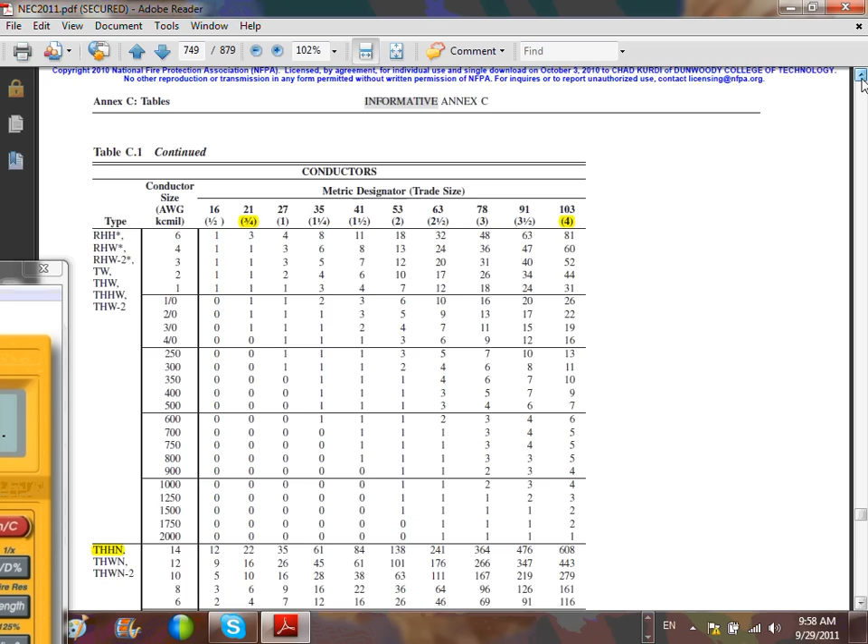Let's take THHN. My favorite is a 3/4 of an inch. Can you guys see? We're still in EMT, 3/4 of an inch. We're non-compact. So I want you guys non-compact. We're not doing compact. So let's go to THHN. Where's my THHN? Number 12. Do I have THHN in this? Okay.

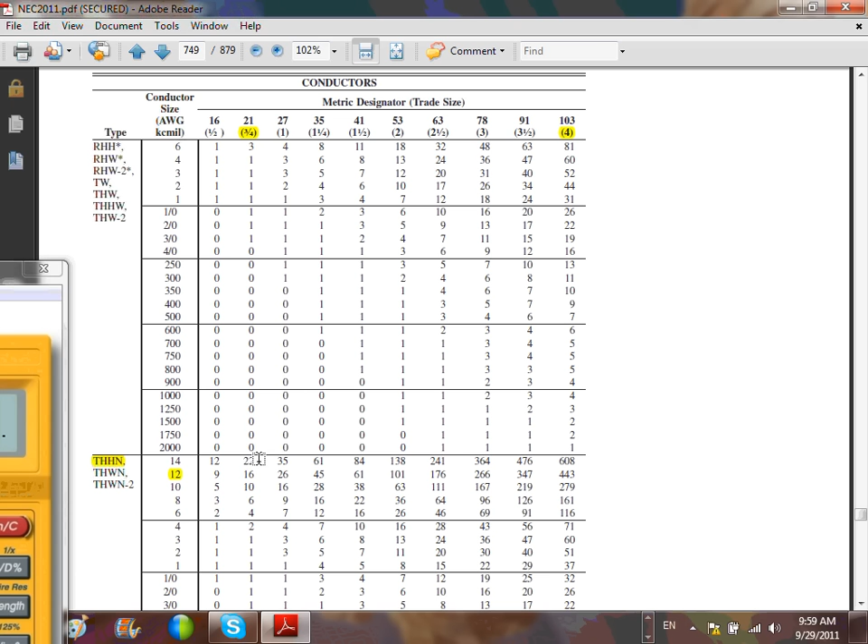Okay, THHN. Go all the way to THHN where we were. I just want the conduit size. Okay, take this. I have THHN. How many conductors, number 12 THHN, can I fit in 3/4 of an inch? 16, right? Let's go do it.

So let's go. What's the conduit size? 3/4 of an inch. You put it as 0.75, right? 3/4 of an inch is 0.75. So I have a 0.75 conduit, which is 3/4 of an inch conduit, EMT. Okay, what's the conductor size? I have 12. So hit 1, 2, and hit wire size.

So I have 12 conductors into the calculator and a conduit of 3/4 of an inch, or 0.75 inch. Now the conductor that I need is THHN. So hit THHN, 16 conductors. You can put 16 conductors THHN in 3/4 of an inch. This is very powerful when you pull your branch circuits for lights and receptacles, 3/4 of an inch conduits, and you pull your number 12 conductors right into it.

Now suppose you change your mind, it's not THHN anymore, it's XHH. No problem. Click on XHH, it gives you 11. You might have to go down, guys, to find the XHH. And if you go THW, it's also 11. Can you guys verify that THW is 11 too? Let's go verify that one. I need THW. I think it's at the top here.

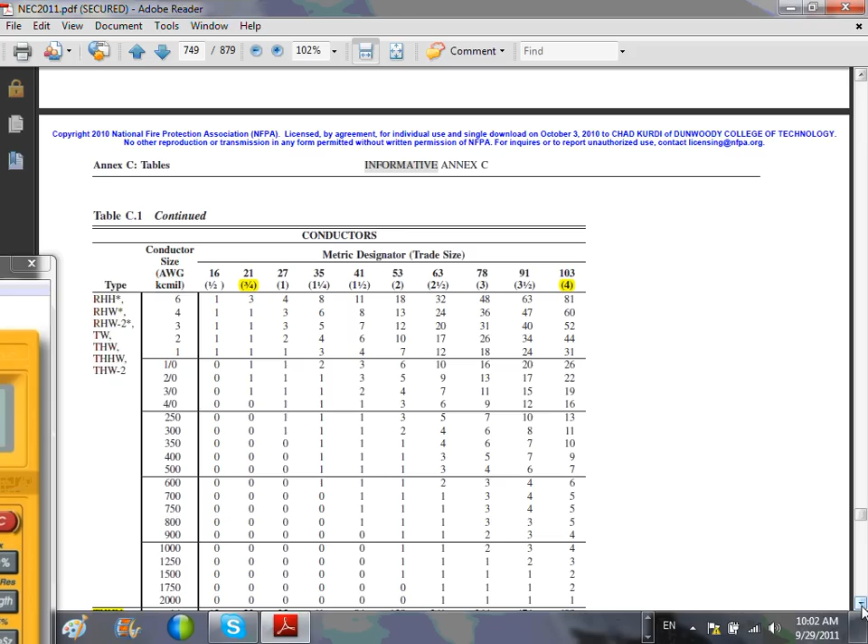Okay. How about THHW? Do we have THHW? I don't have THHW with this size. Comes up with 8. Interesting. I don't know what they took. Let's go do it one more time just to make sure that we did it right.

Okay, clean that one. Is my conduit still EMT? Yup, it's EMT. My conductors are 12. Here's my 12 wire conductor. And my conduit is 0.75, 3/4 of an inch. Here's my conduit. Perfect. I need to find THW. 11. Interesting. I know it's good for the THHN anyway. Still doing 11.

Are we missing anything here? Why is the code giving you 8? Are you sure you're on the right one? That star indicates compact. No, I am in maximum number of conductors, not a star here. See it? And I have THW, right? 8. For number 12, if it's TW, TW will give you 11.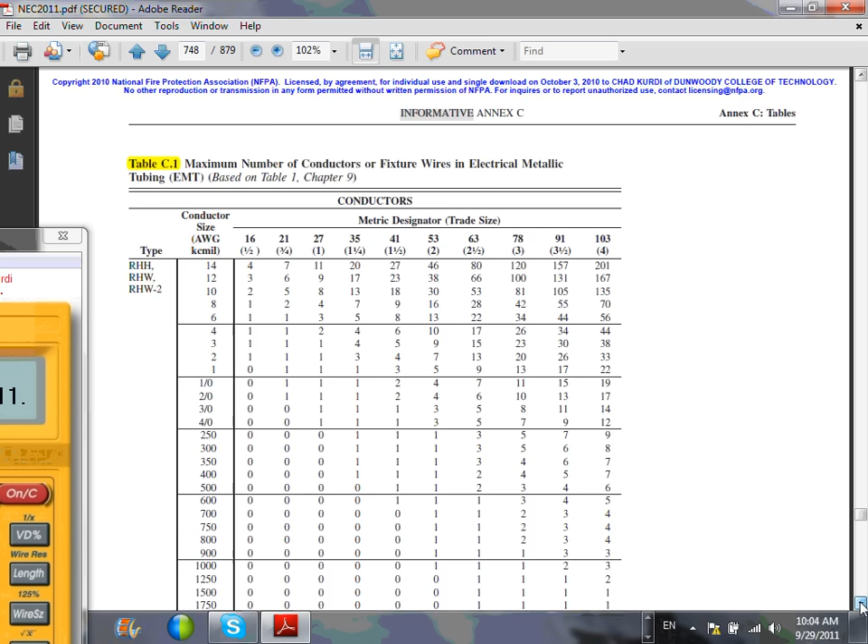Interesting. Can you show me that table name again that you're on? The top, here you go. We're in Annex C, C1. That's interesting. So THHN works. THW gave us a different number. So that's all what I want to show guys in terms of conduit fill. Any question about the conduit fill?

Now I'm curious to make one more calculation. Nick, do me a favor. Let's use an inch and see if that will work with THHW. Here's THHW. And there's number 8 and an inch, right? This is an inch. It gives you 6. 6 conductors in an inch. Okay, let's do an inch.

So let's try it with an inch this time. So here's 1, and here's an inch. And I need number 8. Here's my number 8 wire. And I need THHW. Here's my THHW. Number 8. Interesting. For number 8. Okay, you see that?

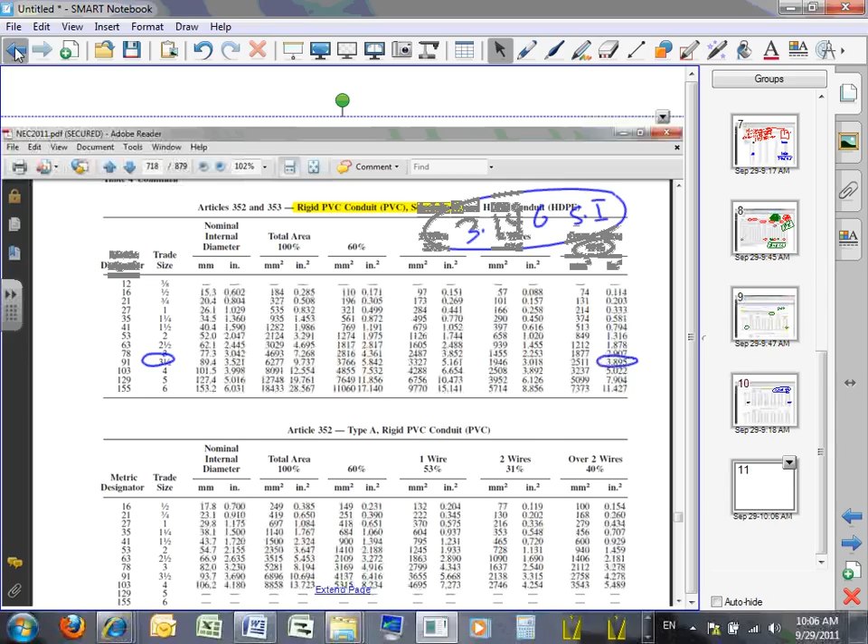Okay, here we go. There's an example about wireways. Let's take an example about wireways.

I'm way out of whack in my coordination here. Okay. Format, insert. I need to coordinate myself. All right, we'll do that.

All right. Let's take this one for wireways, guys. Why does it want to work with me today? Let's take its time. Too many things open. Know what's going on.

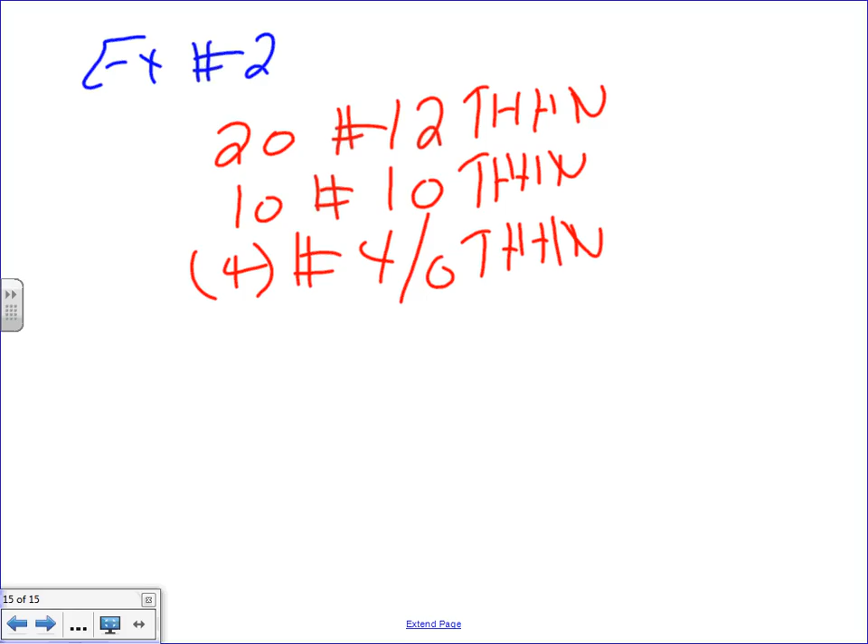So the question is, wireway size. Typical. What is the wireway size for this baby? Okay. We'll start with number 12. Number 12, my friends, when you go to Table 5, under THHN, I have 20 of them. Chris, what is the cross-section area for number 12? I just want the cross-section area for one. Okay, so one of them is 0.0133. That's it? Yes. Okay. And number 10 is 0.0211.

One second, take it easy on me. Number 10, I have 10 of them times 0.0211. Thank you. And the last one is number 4/0. 0.0824. Anybody disagree with my friend Chris? Anybody dare to disagree? No. Any question, guys? So these you get directly from the table. I assume you got them from your calculator, so they were coming from the table anyway.

Wait a sec, the last one was 4/0, right? Oh, 4/0. Okay, not number 4, but 4/0. Oh, okay, I saw number 4. No big deal. 0.3236. Perfect. Add them up. What's the sum? 1.772 square inch. The sum is 1.772.